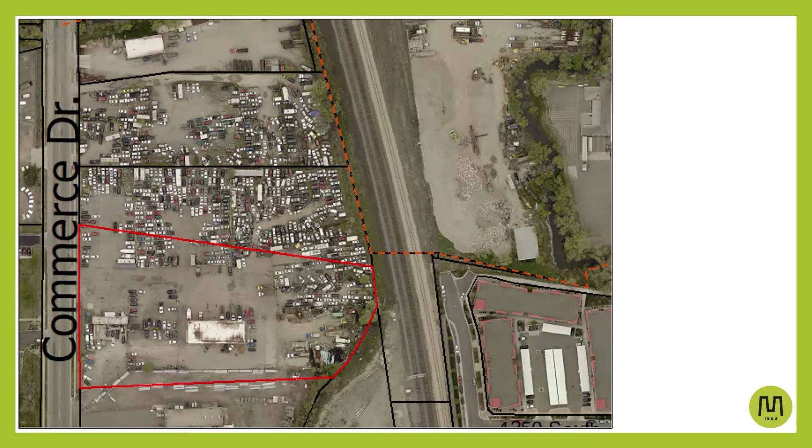Thank you, Commissioner Hacker. This is a conditional use permit application for an auto sales business for Salt Lake Auto Sales, located at 4205 South Commerce Drive, here. This is Commerce, obviously, and then Humane Society is here, and I-15 just further to your left. It is in the MG zone. Auto sales are a conditional use in this zone, so allowed subject to any conditions.

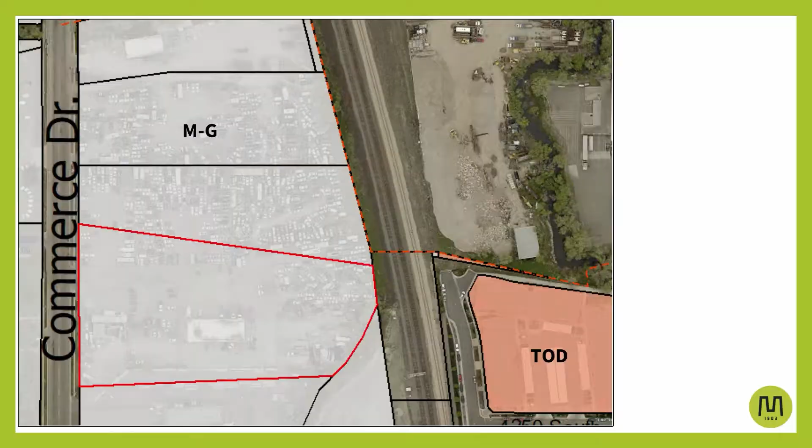The applicant is proposing to take a 215 square foot office space in the area. This is the existing building, a 3,600 square foot building. The applicant is going to be using the highlighted spaces for display vehicles, and also has access to these 4 stalls for customer parking, as well as these ADA spots.

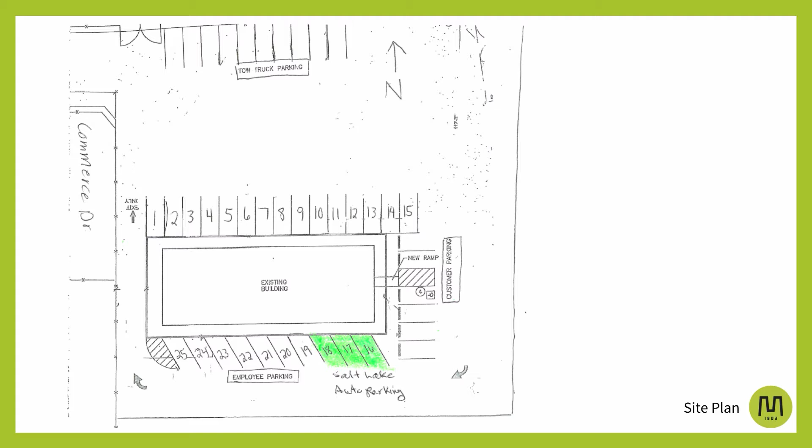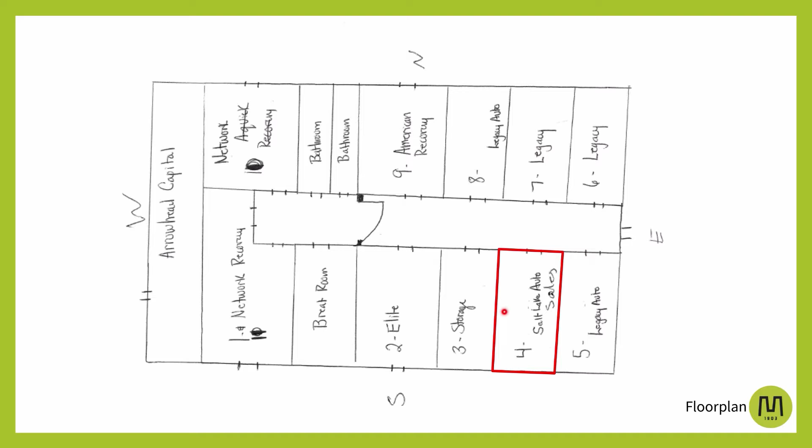So here's a couple photos of the site. These are the exact stalls that he would be reserved. We are requesting that you approve this use, subject to 10 conditions. However, a couple things to go over: he's going to be in Unit 4 here, and this is the entrance that's located here.

Some of the things we'd like to address is the landscaping. Typically in this area, we require landscaping to be improved whenever we go through a conditional use. So we are asking that the applicant and the property owner work with staff to bring the property up to current city code when it comes to those landscaping ordinances.

Additionally, the applicant will need to obtain a sign permit for the sign that was posted. I noticed this evening when I went out and shot some photos that there is a sign for Salt Lake Auto Sales already up, so I will need to get a sign permit for that, so that's all taken care of. Other than that, we are recommending approval subject to the 10 conditions listed in your staff report.

Questions I can answer for you guys? Should be one to go back to the street view. Sorry.

That one? Yeah, so that's all asphalt then, correct? Yes. Okay, it's going to be difficult with the landscaping. Yeah, okay.

Do we require an irrigation system as part of the landscaping improvements, or can they just plant the stuff? They would need it to be irrigated, yeah. Okay, yeah.

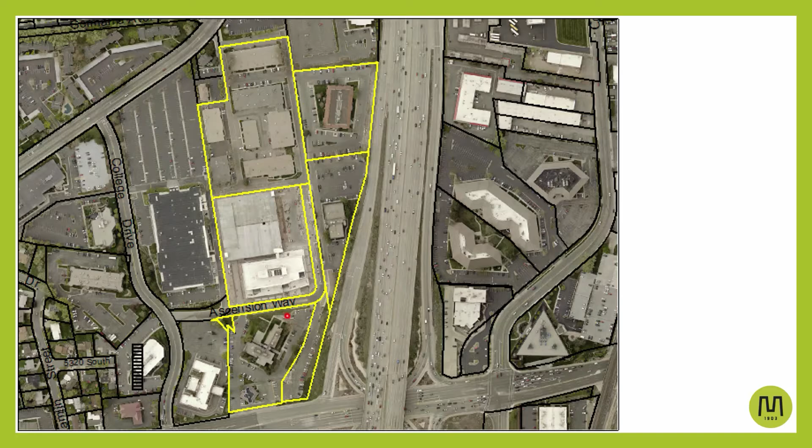They're actually in the CD zone, so it requires that we go through a site plan and building review for that approval. The remainder of the project, or most of the remainder, will be located in the GO zone, the general office zone.

Did want to show you some pictures. I have to credit Zach for the pictures. He climbed a parking structure today to get these for me. So you can always count on Zach.

You can see the new Building 1 from Security National right there. This is the building that will be demolished to make way for the new building and temporary parking structure, and you can see the Taco Time there.

The new building is 6 stories, like the existing Building 1. In the new master plan that's part of your packet tonight, you can see how things all fit together - all new buildings will be 6-story buildings, so we don't have the differing heights, the 4 stories and 8 stories. They'll all be 6-story buildings.

Along with the new building - we'll come back to that in a moment - this is about just under 220,000 square feet of office space. Considering the square footage of the existing Building 1 added to this 220, we're approaching 450,000 square feet or so of Class A office space here. We haven't had that in the past in Murray, so we're excited about that.

In this particular phase, it will include this new building, Building 2, and a temporary parking lot to the west of it to accommodate what we need. We have some additional parking still available in this first structure - as you remember, it was designed to handle more than just the parking needs of Building 1. So some parking is still available there, and we'll have additional temporary parking lots constructed at this time, because the applicants, Security National, are going to complete the roadway improvements and widening of this roadway through the project and out north to Murray Boulevard as part of this phase. So all the improvements and utilities go in for that road as part of this building and parking lot structure being built here.

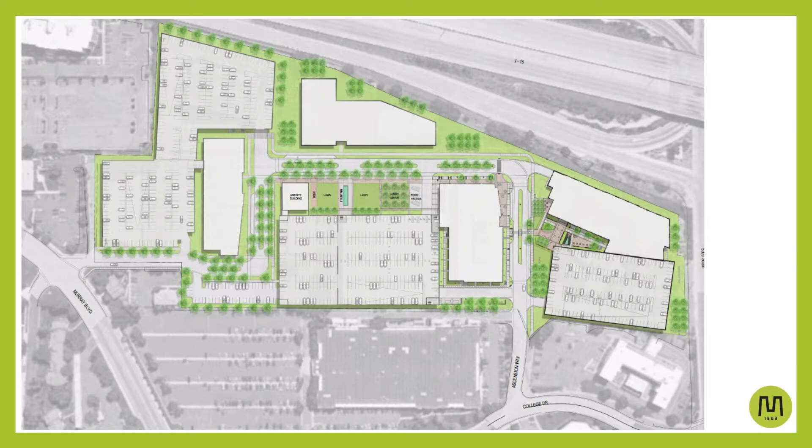So this is a look at the future build out, and just for fun, wanted to point out a couple things. The improvements that come - this plaza space in the crook of this building here - matches the improvements on Building 1, so you get a project feel throughout. In the end, they hope to have a nice plaza in the middle with some amenity space, really having a nice office park when we reach build out.

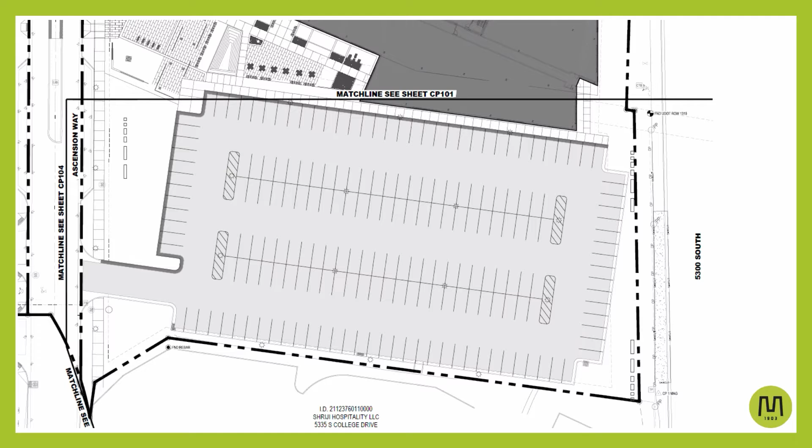The new building, as I said, is about 220,000 square feet. It is associated with that parking structure for the time being, or that parking lot for the time being - that'll be replaced by a parking structure. What we've done in planning with them, with Public Works and working with the applicants, is add the landscaping and light fixtures and electrical and utilities that go with those, which can be preserved as the structure takes its place in the next couple of years. So those improvements will be put in, but not full improvements for a parking lot that we would normally expect, because we don't intend the parking lot to stay.

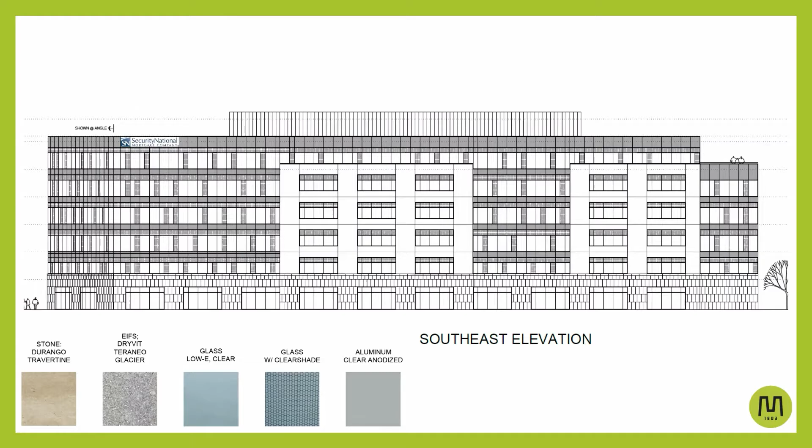So the traffic study is bigger than just this phase, this site plan. Right now, it's the traffic study that we have in hand, and the analysis of it thus far shows that the building can be accommodated. They are still reviewing that traffic study, and there probably will be modifications made as they move forward to other phases. Trey, our city engineer, has engaged Joe Perrin, a traffic engineer of our own, to look at that whole study as well, and they're still looking at that.

And we'll have updates for you periodically as we go through. But right now, they are recommending approval. The traffic study has shown that it can be handled with these conditions in place. Do you have any questions for staff at this point? Any questions for staff? No? Great, thank you.

So the applicant, come forward, please. State your name and address for the record. Brandon Federico, 222 West, 925 North, Centerville, Utah. Have you had opportunity to review these conditions for approval? Yes. Are you going to be able to comply with all of those? Yes. Do you have anything to add to the staff report? We do not. Jared did an excellent job. All right, thank you.

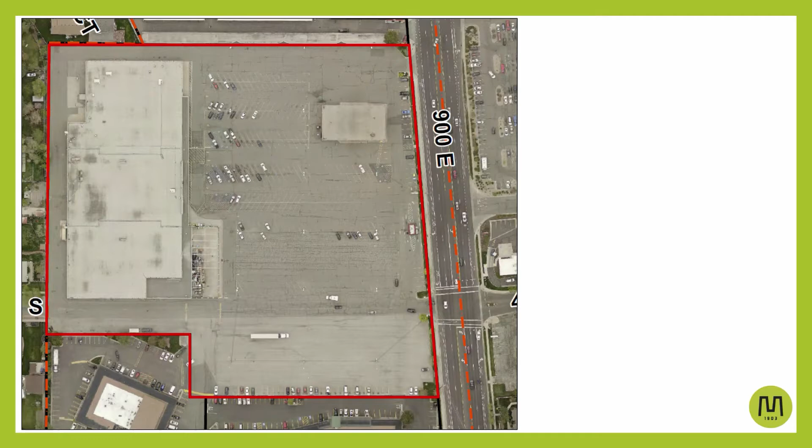Thank you. So as you said, this is a review for a conditional use permit and a master site plan for Van Winkle Crossing. It is a mixed-use project. This is the old Kmart site, 4670 South, 900 East. It is 10.52 acres altogether. You can see the Ivy Place Shopping Center on the south side, and then 9th East. This was in the CD zone formerly. It's now in the mixed use zone.

This larger—I'll move right into parking here first off, just to kind of clear up a couple of things that came up in a lot of the comments that we did receive.

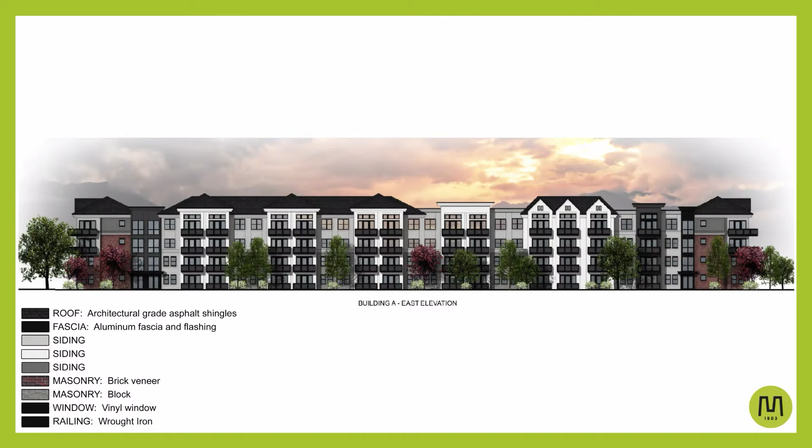This is an elevation of building A, the one we were just discussing. There are some nice variations that break up the roofline a bit—we have some flat-roofed areas along with pitched ones.

Let me come back to one thing before we get to the recommendations. Height was a concern, and we did verify it. This project is evaluated on three basic things, starting with residential density. We allow 40 units per acre this far from transit stations. Mixed-use zones in Murray have typically been located around transit stations, but this project is not near one—that was recognized when we amended the mixed-use zone not long ago.

One significant change was adding a density gradient: up to 100 units per acre near transit stations, stepping down so that outside of a mile, you can't do more than 40 units per acre in a mixed-use zone or project. We allow 40 here—this is a 40-unit-per-acre project residentially.

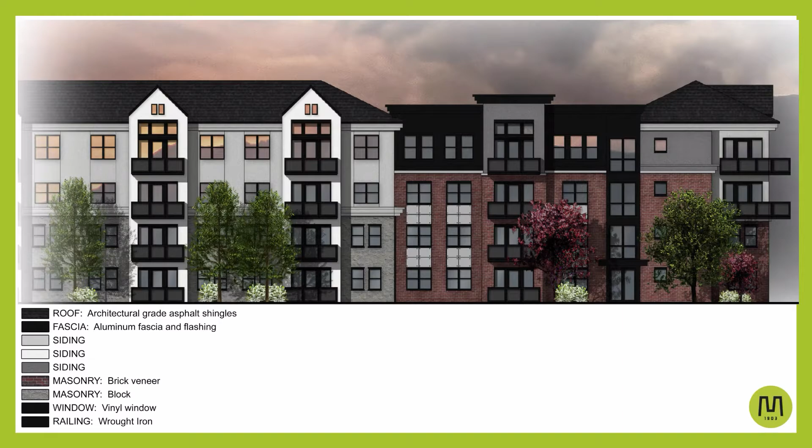Jared, can I ask you to expand on that for a second, since the lingo isn't familiar to all of us? Sure—so when you say mixed-use zone, is that like the European idea of a high-density community where everyone hopefully walks because everything's in walking distance, and that's why it's ideal near a transit system?

Yes and no—near a transit system, yes. Around a transit station, we can accommodate 100 units per acre because there's a greater likelihood people can walk right to the station. In this outlying area, we used the mixed-use zone because we didn't have another one, but you might call it a village center zone if we had written it separately from our mixed-use zone.

What we did was add components to our existing mixed-use zone that we use around transit stations, which would downgrade that density residentially and allow that horizontal mixed use that's much more likely when you get into a village area like this or an outlying area, but still allow mixed use, which is a popular development style and a needed use in the valley right now.

So what you get here is some trip reduction from the likelihood that people in the project will use some of those services that are there, and even avail themselves of buses that might be on 9th East. But you're not going to have the same number of people utilizing the train station because they're not as close to it—by definition, they're more than a mile away. So we get some benefit for traffic and parking reduction, but not as much as we would near the station.

Right, so it's more of a village center. But you're taking that into consideration by reducing numbers. And the idea is also that you'll hopefully walk to the grocery store, walk to restaurants around, and reduce trips—some trip reduction does occur, not as much as when we're right near a station, but that's why the density is reduced as well, to reflect that. Does that make sense?

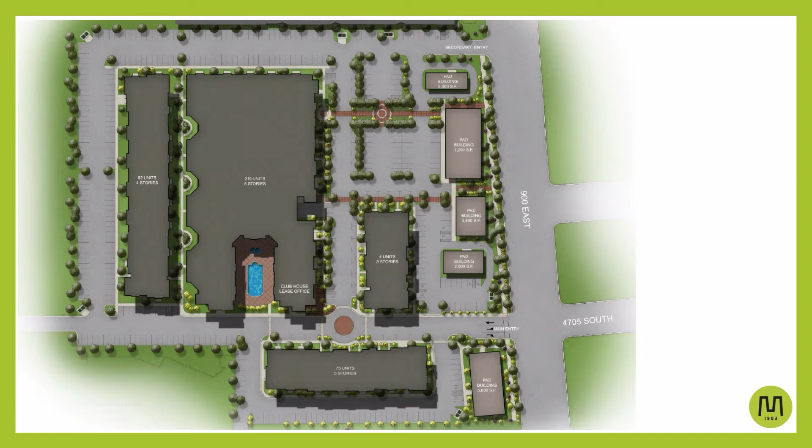Another thing to point out, and it's not shown well on the colored plan—Kmart wasn't buffered from this neighborhood at all. And buffers are what they are. We'll require trees and landscaping in this buffer, and we're recommending a masonry wall as well. A lot of the buffer is just the fences that people have put up in their backyards. The Kmart wasn't appropriately buffered at all. These are residential structures, but they still need to be buffered.

Higher density multifamily needs a buffer, so we're recommending this—a 10-foot required buffer with a masonry wall as part of the MOU, to be maintained and kept in place. The developers will want that anyway, but we want to see that buffer go in. What's the height on that masonry wall? We didn't set it—it would be at least 6, could be up to 8 feet.

And when would that be determined, the height of the wall? That's up to you—if we feel like we want an 8-foot wall, that could be discussed tonight. 6 is the minimum we would require, 8 is the maximum the code would allow for a buffer wall.

A couple other things to note: we had asked them to provide pedestrian connections throughout as part of that zoning, and they've done that. You can get out of these units into this nicely landscaped pedestrian area between the buildings. The buildings are arranged to face the accesses as much as possible instead of just a parking lot, making it a more pleasant experience to live and walk here. Anything we can do to encourage people to get out and walk, reducing trips, is what we want to see.

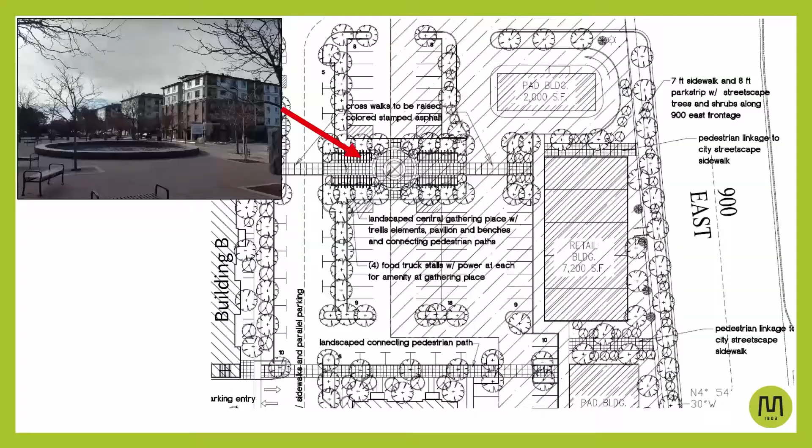So that's what we've tried to encourage through the design process with the applicants. We do feel like we've been able to do that, and we want to recommend that the master plan and the conditional use permit be approved tonight with these conditions.

Many of these come from engineering, and they involve a traffic study that's been done, maintaining that open access, reviewing with fire and making sure that access works for emergency services correctly, seeing the MOU be put in place so that we get guarantees of those different elements that we want to see, and things of that nature.

Are there any questions? Do you have any questions for staff at this point? As far as construction time frame, when they're constructing, how late in the day could construction go?

I'm concerned about the neighborhood, and I don't want to have stuff banging and backing up and beepers going all hours of the night. That's a really good question.

So normal construction hours are what we would allow. That's based on the health code for sound ordinance. So between 7 a.m. and 10 p.m. there can't be construction noise outside those hours. They can go as late as 10 p.m. under the normal health codes.

Is there any authority we would have to modify that at all? I don't see that typically, but I can't fully answer that question. So we're talking about construction—is that access going to stay open during construction?

Access would have to remain open during construction as well. We'll make that part of the MOU. The access was important enough to the safety personnel that we wouldn't want to see that closed down or impacted during construction. It's a 10.5 acre site. If they can't stage for these buildings without closing that access, they shouldn't be building.

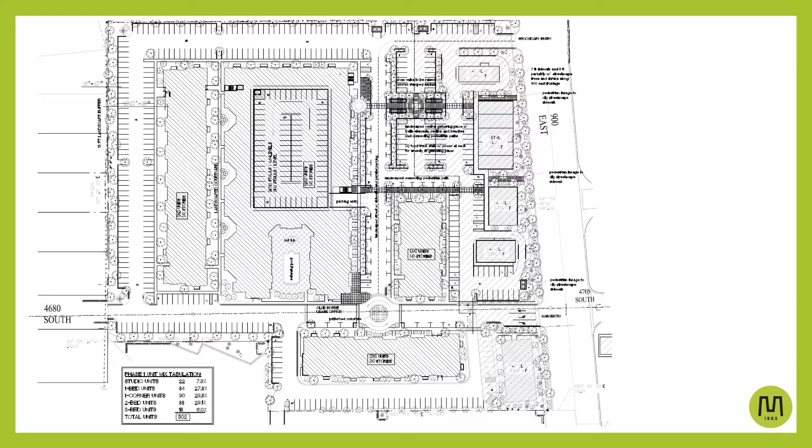So speed can be reduced even without the roundabout if it's not feasible to keep it. What would the speed limit be on that road, and will it be posted? I don't think you'd need to post it with the visual cues in place, but in a parking lot like that, 15 miles an hour at the best. You'll find yourself probably going 10 when it's built out. Not at first, but when it's built out, you won't drive through there more than 10 or 12 miles an hour. So I would see that reduced. I would plan on that. It's an open parking lot.

I don't want to miss things, but there's an awful lot. Reducing the height of the building was mentioned a lot of times, so I want to address that. When we made these changes to the zoning ordinance, to the mixed-use zone, we addressed a couple of things specifically, and one of them was height. 50 feet is what we allow at that distance, at 100 feet. The proposed project meets the standards of the ordinance that we have set as a city and agreed to. So I don't feel like I can recommend that it would be appropriate to reduce the height of the buildings. I know that's not the desired effect looking at the neighborhood behind, but these are the heights we've agreed to allow in the mixed-use zone.

We've done some massing, looking at the buildings with tools that Zach's familiar with in the office, et cetera. The impacts are there, but when you look at the impact of the existing Kmart building and the increased distance, you do see some reduction in that impact. You won't see it till it's built, but we do feel confident in recommending that this height is appropriate because the zoning allows it.